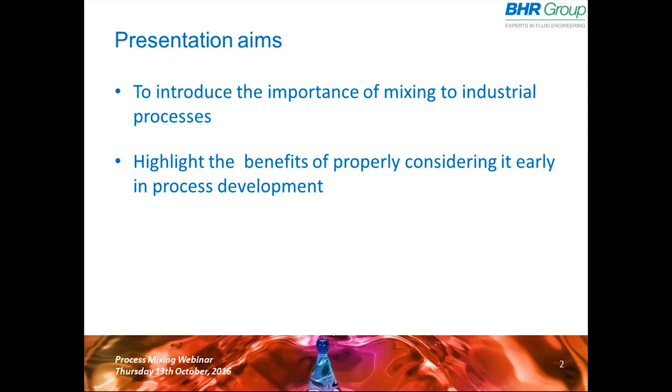The aim is to introduce the importance of mixing to industrial processes. The key thing is highlighting the benefit of considering this early in process development and not spending one's time solving mixing problems once they've appeared, but trying to preempt problems by thinking about it early on.

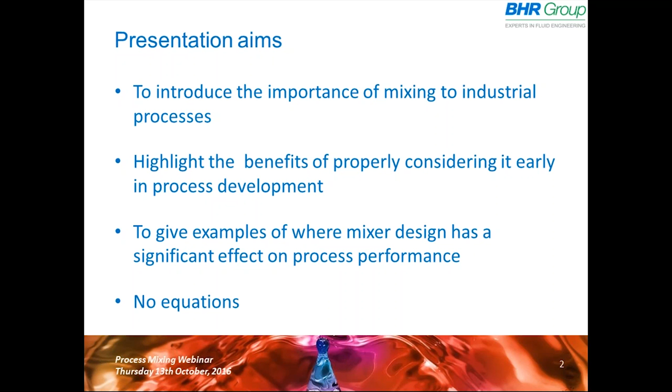I'm going to give some examples from consultancy work we've done to show where mixing performance has been a significant issue and mixer design has been important. And unlike other presentations, the aim of this is very much not to include any equations. So we're giving examples and talking about the key issues rather than trying to do any calculations or sums here. We'll come on to that later on because we can give presentations covering those topics in quite a bit more detail.

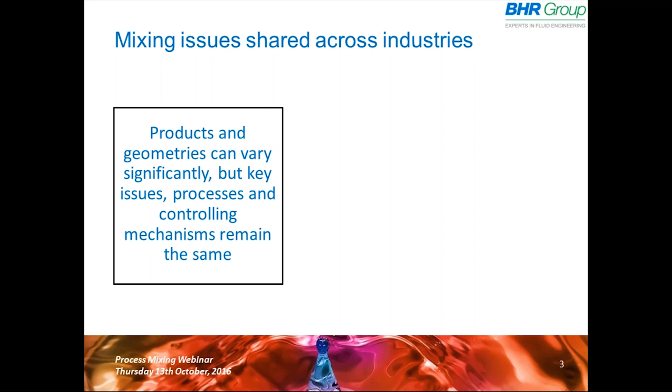So one of the things that certainly at BHR we find very interesting and very useful about mixing is, as a topic, it's a real issue across many industries. We can see a list of some of our consultancy and consortia clients cover everything from pharmaceutical to mining industries, food and drink, to personal care products and water treatment. Very different environments, very different products.

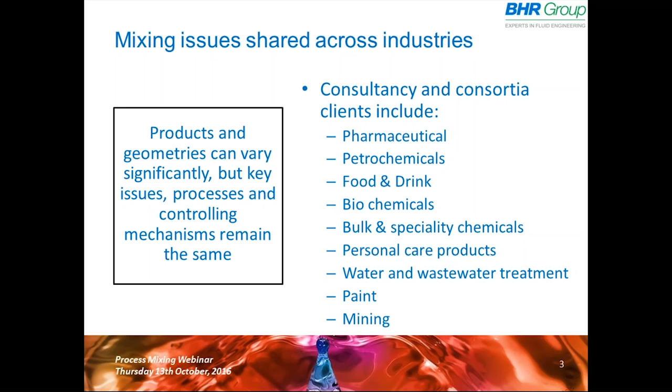But even though the products and the mixer geometries can vary significantly, key processes, key problems and issues, and the controlling mechanisms limiting the mixing performance very often remain the same, independent of the application. And that's good for us because it means we can work for lots of different industries.

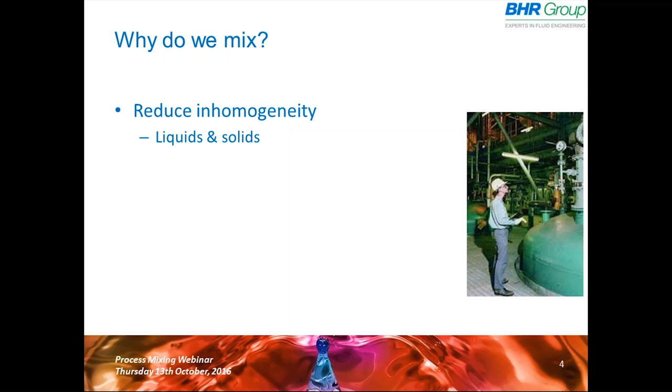So why do we mix? And the obvious first answer is we mix to reduce inhomogeneity, to make everything more uniform. And that could be looking at simple liquid phases or trying to distribute solids or gas within a liquid phase and make everything more uniform. However, in some cases, people need to make things more uniform to make a product that can be sold. But very often, we're doing mixing to achieve some other process result.

We might be modifying the pH or doing some transformation involving a change in the rheology or the properties of the material we're mixing. We may be adding materials simply to adjust the concentration of some component. You may be interested in creating a dispersion of two immiscible liquid phases. And so we need to put energy into the fluid to produce that dispersion.

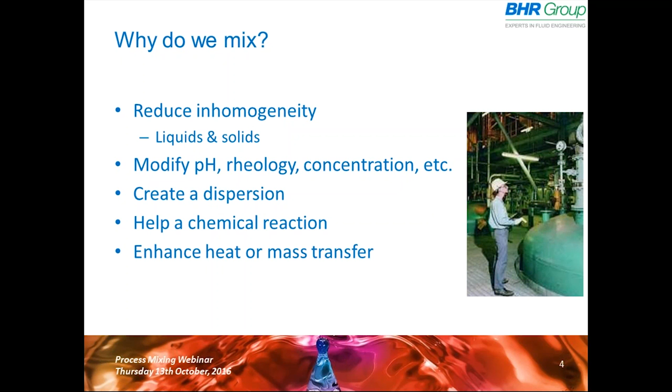Very often, we're mixing to help a chemical reaction. And that's a big part of the work we do, is looking into how does that occur. And sometimes we're mixing just to enhance heat or mass transfer. Very common processes.

So one of the key things, we're talking about chemical reactions. What mixing does is it affects the reaction environment. It affects the zone where chemistry and other things are going on. So mixing affects the distribution of flow and turbulence inside a tank.

And in a big stirred tank like the fermenter you see in the picture, there are very significant variations in the level of fluid turbulence and the velocities throughout the geometry. Things are very well mixed and intense close to the impellers and much less intense near the surface or close to the walls.

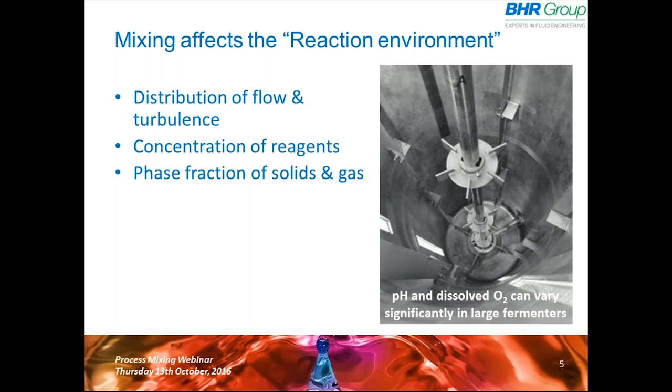And that has a significant impact on the concentration of reagents. If you're mixing two materials and there's a reaction occurring, depending upon the location, the concentration of the different reagents may be different, and that may lead to different products. In a fermenter, particularly in very large vessels, the local values of pH and dissolved oxygen can vary very significantly in different locations in the vessel, and that can have a knock-on effect on the product.

Mixing can affect the distribution of phases, so how well dispersed gases and solids are. And it can affect temperatures and even pressures, and local operating conditions can be affected. And all of these different factors ultimately can affect reaction rates, because the local reaction rate is a function of all of these other variables.

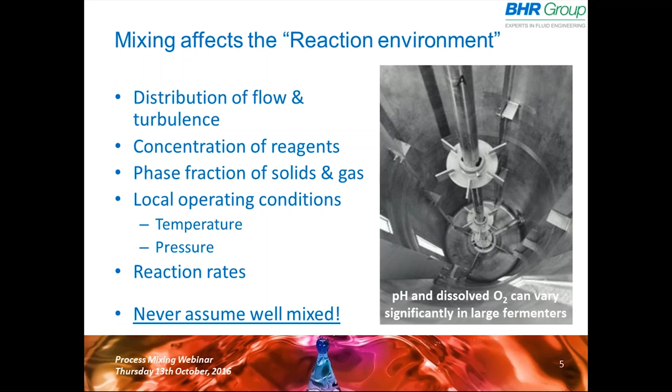So the key thing to any process is never start assuming the process is well mixed. The standard assumption in any textbook is, assuming a well mixed tank, do the following. The correct advice is never assume some mixing vessel is well mixed until you've confirmed that's the case, because things are never perfectly mixed. What you want to do is ensure that they're sufficiently well mixed to produce your product.

So we've talked about why it's important. Where is mixing important? Well, because of the things we've seen already, it's important at pretty much all stages of the process. Everything from the synthesis of intermediates or active ingredients early on in the development of a drug product, let's say, but mixing is also very important when it comes to the final product formulation. So at all stages through a process, from preparing ingredients to their processing, mixing can affect a whole range of topics.

It has a big impact on process timescales, and that's very frequently something that we come across in projects, looking at how production rates can be increased, how batch scheduling can be improved by optimizing mixing. And it also has a big effect, not surprisingly, on downstream separation.

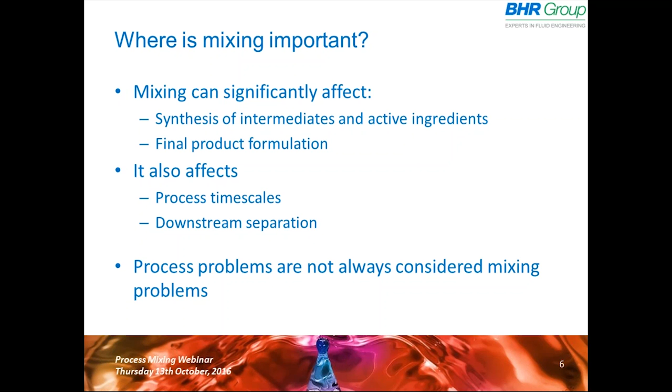And that's where we've got to be very careful, because some process problems, maybe a downstream separation problem, aren't always considered as a mixing problem, but very frequently the cause of the problem is upstream, and if the mixing's improved, then there's less issue with separation afterwards. So it should always be considered, even for further downstream processes.

So if you're looking at developing a process, where is mixing important? Where has it got to be considered? The obvious starting point is as early as possible in the chemistry development or the process development. We've got a picture of a stirred beaker, but obviously process development can go on at much smaller scales, in microvials and so on. And there's even work being done looking at how mixing can affect product quality, reaction or production, and the selectivity of different components.

When we've got early stage process development, the key thing to do, if at all possible, is check to see if there's any sensitivity to mixing, and to do that at as early a stage as possible. Because if you find at the lab scale that mixing does affect the production, then you know to take more care and consider it later on. Sometimes it's just a case of doing your lab experiments at a range of different mixer speeds and seeing if that has any effect on the product. And rather sadly, it's all too frequent that simple test has not been done.

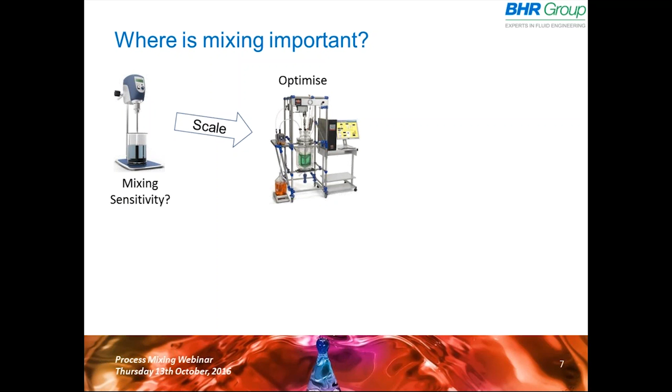And then, often you want to start scaling it up to some pilot scale rig, and we need to consider how to translate the mixing performance to give us the same product and distribution of products at the pilot scale, where we may be dealing with a few liters or tens of liters or maybe even hundreds of liters.

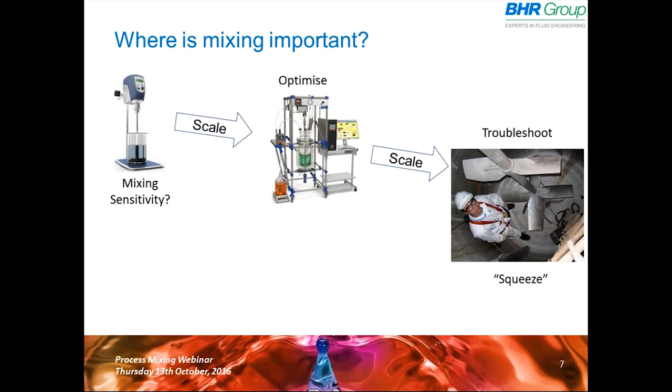And when we're working at that scale, a lot of what we're looking at is how to optimize performance of the reactor and understand the optimum operating conditions and the sensitivity to different variables. And mixing can play quite a significant part in doing this.